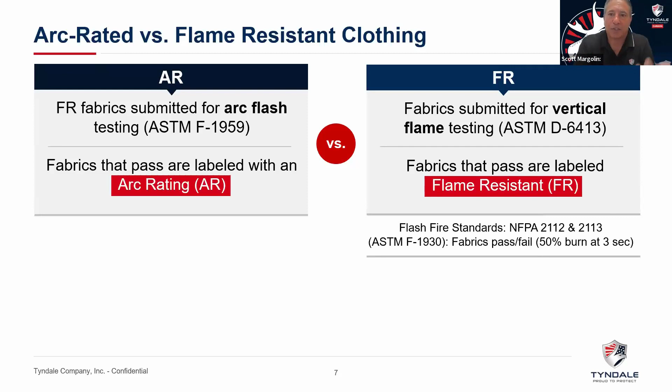Not all FR is AR. So not all flame resistant fabric has been tested in arc, because if you're selling to welders, why do you care? But all arc rated clothing is flame resistant. Hopefully that makes sense.

Okay, so why do you need it? Again, the most catastrophic injuries and fatalities - and that's a mannequin, by the way. I like to keep it real, and each time I turn the page from mannequins in labs to real people, I'll warn you in advance, but that's a mannequin.

And you can clearly see here that the arc comes out of the box, right? It hits him in the front, doesn't hit him in the back. But as soon as that shirt ignites, you're now going to expose much more of your skin surface area to fire than the arc would have if you were naked. And that is, again, because you're wearing fuel, you're covered with fuel.

And the part of your body that typically doesn't have that clothing on is up here, right? And where does heat go? And where does fire go? So it's not a good thing to allow to happen. Where flame-resistant clothing and arc-rated clothing won't ignite, will self-extinguish, and limit the area of injury. And if it's insulative enough, the area of injury under it as well.

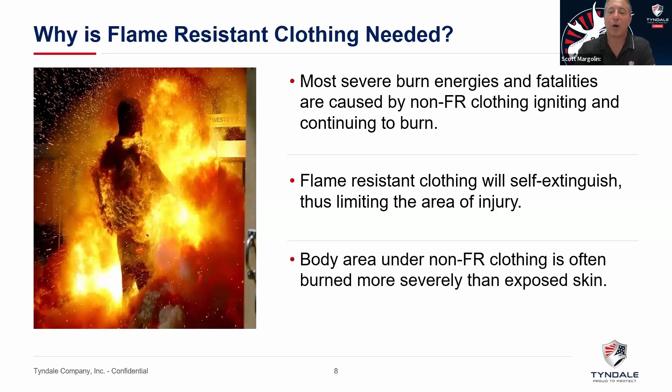So again, not to belabor a point, let's put all that aside for a minute. Let's spend 2 or 3 minutes talking about what we're looking to avoid here. This, if I said, why do you have to wear a seatbelt? Well, you either wear it because you don't want a ticket, or you don't want to go through the windshield or the steering column or the B pillar or whatever. This is kind of like that.

When there's an incident, and you're hopefully never in this position - if I were live, I'd ask how many of you have been - you're sitting in the burn center or the emergency room. You're waiting for the surgeon to come through those double doors. The first question in everyone's mind is always, will he live? Will she make it? What's in the burn surgeon's mind at that moment to answer that question is 2 things.

Generally, the age of the victim - the older you are, the less likely you are to survive the same TBSA, or total body surface area, that receives 2nd or 3rd degree burn - and the TBSA, or total body surface area. So age and total body surface area.

Now, 1st degree burn is sunburn. We've all probably had that. It hurts, but it heals. We don't need medical intervention. We measure it, but we don't report it because it's not predictive of fatality.

So if you know 2nd and 3rd degree burn, and you just heard me say it's 2nd and 3rd degree burn combined that predict fatality - why? That makes no sense, right? They're clearly way different injuries. So let's explore for a minute what makes them the same for predicting fatality, because every fiber that you can buy for arc and flame resistance, every fabric, every garment, every brand, every standard, every ASTM test, every CGSB test is all predicated on the fact I'm about to get to that's not written on this slide.

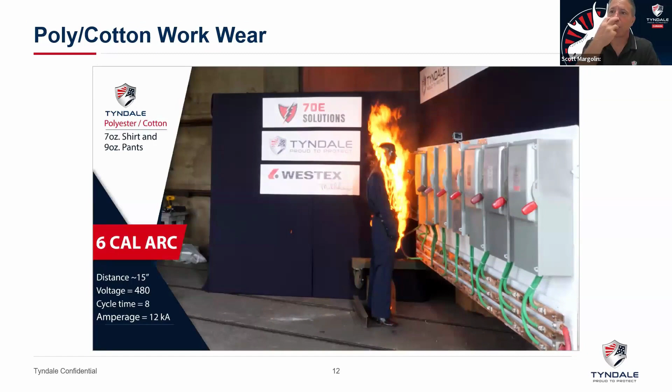You can see how quickly the fire spreads to areas like the lower legs and back that it never even hit. Clearly, little holes are all right here. We use GoPros for a lot of this so you get a really up close and personal look at these things.

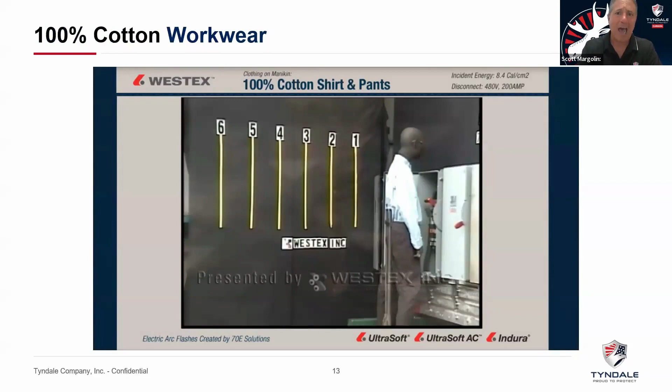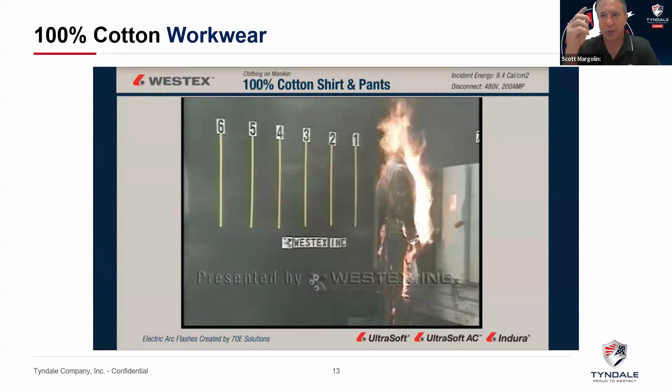The biggest myth in our business is that cotton's protected. Cotton is not protected. It has four major problems: it ignites as easily as you can clearly see, burns hotter meaning you'll do more damage to yourself, fire spreads more, and it's way harder to extinguish with a foam extinguisher since you're not using water around your electrical gear — in a foam extinguisher this will reignite, reignite, reignite. And cotton's heavier, meaning more fuel, longer fire, worse burn. So cotton is not acceptable except as a base layer, completely covered by FRC.

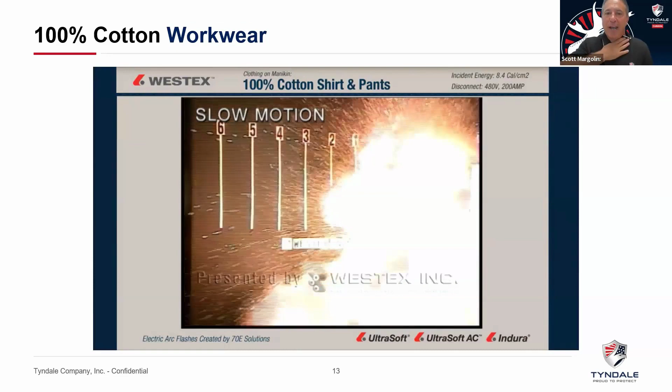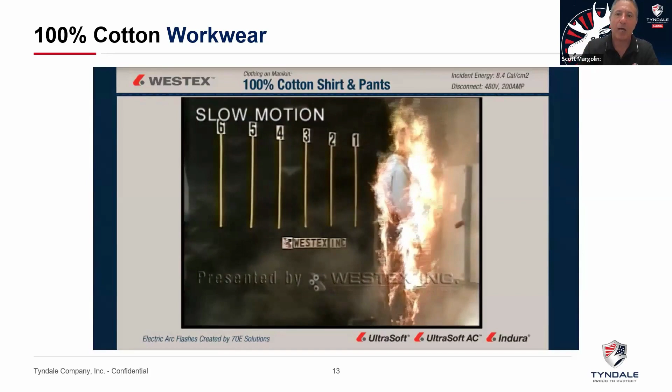What about flame-resistant and arc-rated clothing in those same circumstances? Wrong video — so this is actually exceeding the arc rating of the garment a little bit. I want to show you that on purpose.

So all these videos are downloadable. They're all narrated, so you don't need to hear my talk right now to be able to use these in the future. But as I mentioned at the outset, I like to keep things real. So that was the lab.

What about the real world? Now, I've learned better than to use pictures from a country that I'm speaking in, so these are from South America. All it takes, folks, is to once in a live presentation run into people in the audience who know the victim on the screen, and you'll never make that mistake twice.

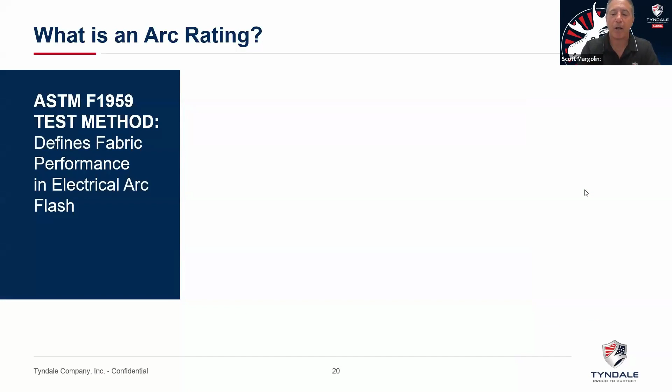So let's talk about ARC flash and ARC ratings. The ASTM F1959 test method, the ARC rating method, which I happen to chair, the vast majority of that work is done at Kinectrics in Toronto, and it defines ARC flash. There's two ways to get a rating: ATPV and EBT.

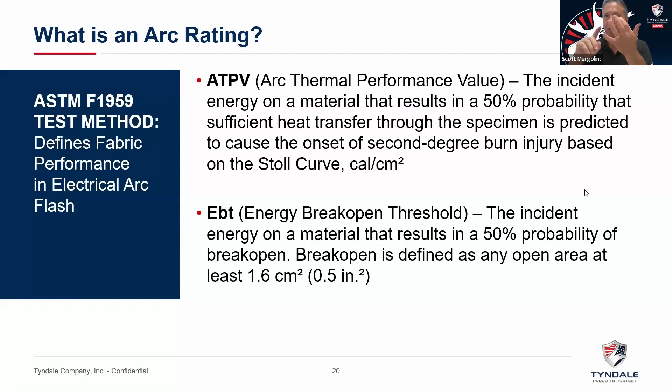These confuse a lot of people. The truth is, it doesn't matter whether it's ATPV or EBT. They're just two different ways to fail the same test. The test is the same. The fabrics are the same. The difference is how it fails that test. What do I mean by that?

Well, an ATPV fabric will let a burn through the fabric, but not a hole. An EBT fabric will allow a hole through the fabric, but not a burn. Well, you don't want either a burn or a hole. So we keep testing until we get either a burn through the fabric or a hole through the fabric, and that's kind of where you stop. I'm oversimplifying it a little.

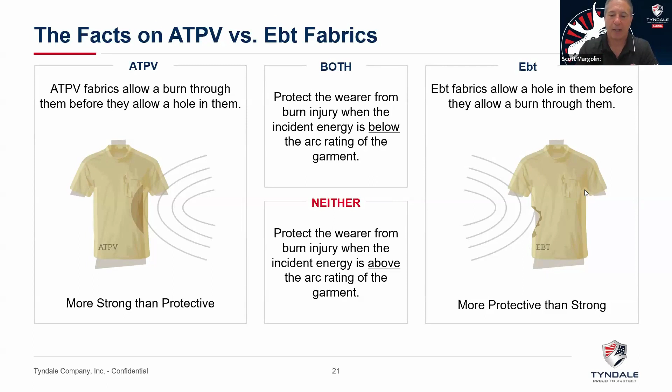But then you have an ARC rating, either an ATPV, meaning you got burned before you got a hole, or an EBT, meaning you got a hole before you got a burn. Either way, you don't want a burn or a hole. Both ATPV and EBT protect the wearer from burn injury below the ARC rating of the garment, so they're the same in that sense. Neither protects the wearer above the incident energy rating on that garment. So they're different in how they fail the test, the same in every other respect. Put that to bed - they both protect equally.

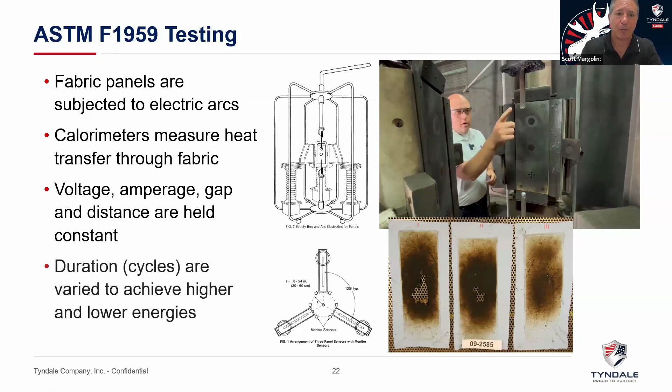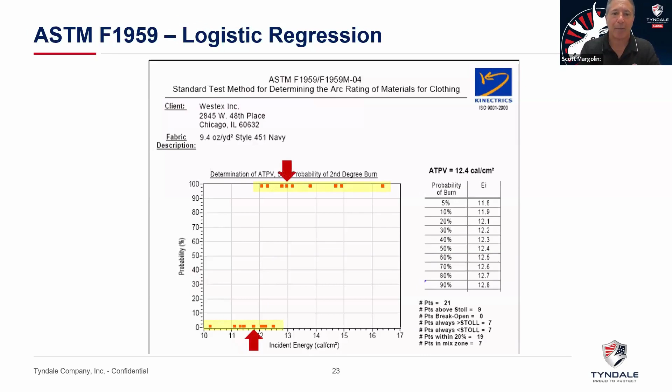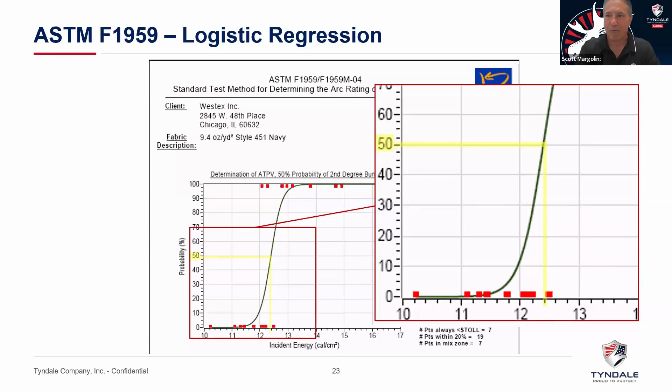The computer then averages that data, the top that failed and the bottom that passed, and it creates a black line through it at the 50% probability, where the 50% probability of a burn crosses our average. You come down to the bottom of the graph, and that's your ARC rating - 12.4 calories for that fabric and everything ever made from it. It's a really good test. And again, the vast majority of this work is done in Toronto at Kinectrics.

So now that's how you comply. What about compliance versus protection? Are they the same thing? It may be, maybe you think they are. A lot of people do. Safety people are busy - you got fall protection and hearing protection, backs, worried about people backing their vehicles into things, illness, whatever it happens to be. So it's really tempting to take a shortcut and say, anything that's Cat 2, I'm fine. 8 calories and above, I'm Cat fine. 2112 compliant, I'm fine. 15520, I'm fine.

What nobody ever tells you, and you won't know unless you look, is how many times is that fabric sample washed before it gets in these tests.

It tells you how good the fabric is new, and it tells you nothing about how durable that flame resistance is to laundering. Nothing. 1506, which you have to have or used to have to be 70E and Z462 compliant, requires 25 launderings. If you wear your garments during the week and launder them on weekends, 25 launderings gets you 6 months. You're now out of arc flash FR durability standards on planet Earth at 6 months, 25 launderings.

What do you do? Trust matters, reputation matters, experience matters in this business. Now, 2112 and 15520 have a 100 laundering standard, which is better than 25.

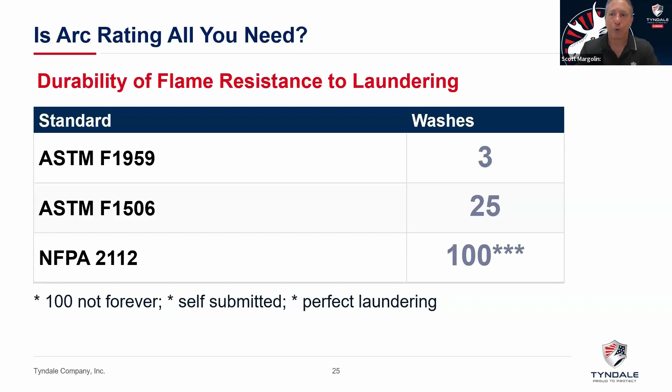So there is no guarantee of flame resistant durability by any of these standards, no matter which country, no matter which hazard you look to. Experience and track record matter, and they matter a lot.

Again, the compliance, what a lot of people will do is shorthand: I want inherent, I want Cat 2, I want 2112, I want UL certified, I want the lightest stuff you've got. What they probably should be specifying is trusted brands and suppliers, guaranteed flame resistant for the life of the garment, without an asterisk that says per 2112, 100 launderings.

By the way, weight doesn't equal comfort, and you might want to start specifying Oeko-Tex 100. That is not Canadian or American, but neither of our countries has a good standard for toxicity of chemistry and fabric, which is becoming a bigger and bigger issue.

Now, all the reputable stuff produced in North America, there's really no issue there, but more and more we see products where there are issues, inexpensively made, cheap products from overseas. Oeko-Tex 100, if it passes, will make sure any fabric chemistry that's there, including dyes and finishes, not just FR chemistry, is below thresholds of concern.

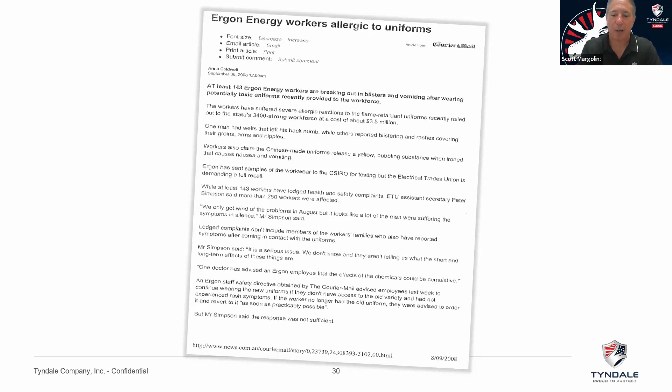You stay with the reputable brands, the proven, experienced brands. This is not a business where the lowest cost product is probably worth exploring. This is the biggest cause of failure.

It's crazy. So shrinkage with these garments, a lot of these fabrics — the last thing that you do if you're a fabric manufacturer, if you pre-shrink, is pre-shrink. The equipment's expensive, the equipment's slow, it's often the bottleneck in your production. If you have a 1,000-yard roll right before you're going to sell it to Tyndale or Carhartt or Ariat or Bulwark, you put it through the shrinkage machine and it compacts it. Out the other end, you get about 900 yards. What'd you just do to 10% of your inventory? Gone forever, right? Gone forever.

But if the garment fabric manufacturers don't pay for the shrinkage, you will. So you don't want to be throwing garments away a quarter of the way through their useful life because they don't fit anymore. So we look back to the standards, whether it's Z462, 8 cals, 2112.

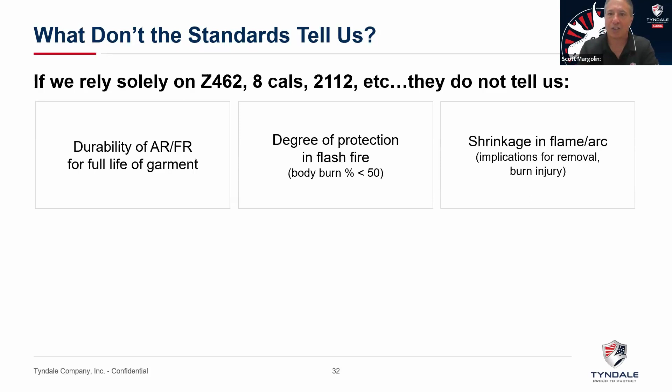They don't tell us about the FR durability of the garment. They don't tell us about the flash fire protection — you'll just say it's less than 50% if it's 2112. You don't know how much less unless you ask. They don't tell you about shrinkage in flame, which matters a lot. Can you get the garment off using the zipper or the buttons, or can't you? They don't tell you about shrinkage in laundry. They don't tell you about potential toxicity unless you specify Oeko-Tex 100. And they sure as heck don't tell you about the thing you probably care about the most, or your wearers do, and that's comfort. Because if it's not comfortable, they're not going to wear it. You're not going to be compliant.

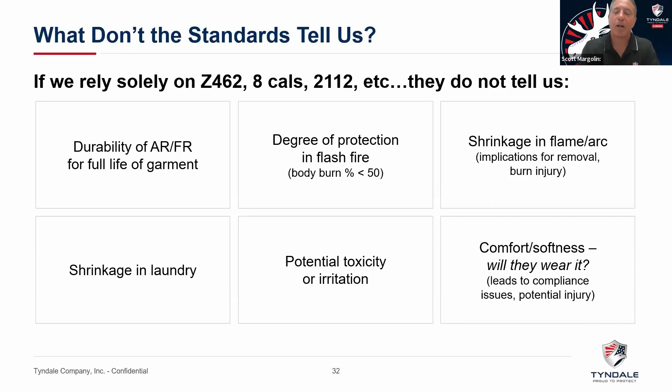So let's turn the page there. Boring, we'll skip that. Comfort, heat stress, and FRC. Heat stress and comfort are not the same thing. They're completely different, and that surprises a lot of people.

Comfort is inherently subjective. If we were live and I looked around a room with 130 people in it, I guarantee you, even though it's the same temperature and humidity in the conference room, there's people wearing long sleeves sitting next to people wearing short sleeves. There's people wearing one layer sitting next to people wearing two layers, sitting next to people wearing three layers. There's people wearing wovens that button up, people wearing pullovers, people wearing quarter zips. What is comfort? Comfort is inherently subjective, person to person, moment to moment, and it doesn't mean what you think it means.

Where heat stress is a definable, quantifiable medical condition caused by body heat building up inside your body that you can't dump either by radiation or by sweat. And then you have organ failure and potentially death if you don't arrest the process.

So PPE — hugely important line in this presentation. No single layer breathable apparel, arc-rated or flame resistant, causes heat stress. I'll say that again: no single layer breathable AR/FR clothing causes heat stress. What causes heat stress is non-breathable, like Tyvek or rainwear, or multiple layers like 40 cal arc flash suits, but not single layer breathable. Heat stress is caused, number 1, by poor hydration, because now you can't sweat. Number 2, by lack of shade, because now you're not getting out of that radiant heat load from the sun. Number 3, by lack of rest breaks to dump metabolic energy you're building up in your body, and sometimes by illnesses or medications. It is not caused by single layer breathable PPE.

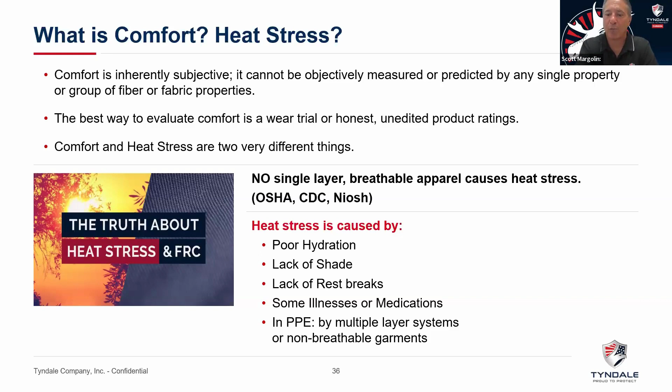So on the comfort front, the stuff coming in your screen now is what almost everybody thinks, when you talk to them at a trade show, causes heat stress.

Pardon me one second, because I don't want my laptop to die. I'm going to go plug it in and continue to talk. That was a mistake on my part, for which I apologize. I thought it was plugged in, and it's not, but it will be. We won't lose you.

So what is comfort? It's not the weight of the fabric, it's not the hand. Breathability is what everybody thinks - weight and breathability, give me your lightest weight, most breathable product. Well, the lightest weight, most breathable fabric that Jason and I are aware of is window screen.

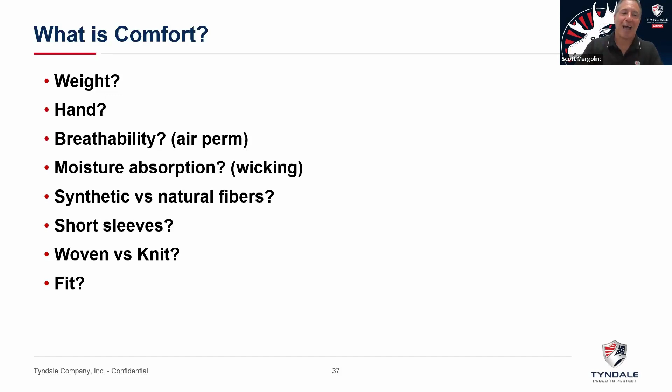You're not wearing window screen. So it isn't about numbers. A combination of these factors, maybe, but at the end of the day, what really controls comfort is choice. Number one, if you've ever gone to the beer store, or taken a kid or grandkid to the cereal aisle of a market, you know Canadians love choice, agency, the ability to decide for yourself.

Some people want a quarter zip. Some people want to wear the color they like, blue, red, whatever. Some people want a brand - Nike, Under Armour, Bulwark, Tyndale, Ariat, Carhartt. That's what makes them comfortable that day - the brand they're flying, the color they're wearing, or the style.

When you go to the store in your personal life to buy a garment, do you walk in and look for the rack of the lightest weight clothing? No - you go to the rack of the brand you like, or I'm looking for a quarter zip today, or my Levi's, or my Carhartts. That's what you look for, only then do you touch the stuff.

So choice is number one. Number two is fit - if it doesn't fit, it doesn't matter what it's made of. And only then do the things that most people think matter start to matter.

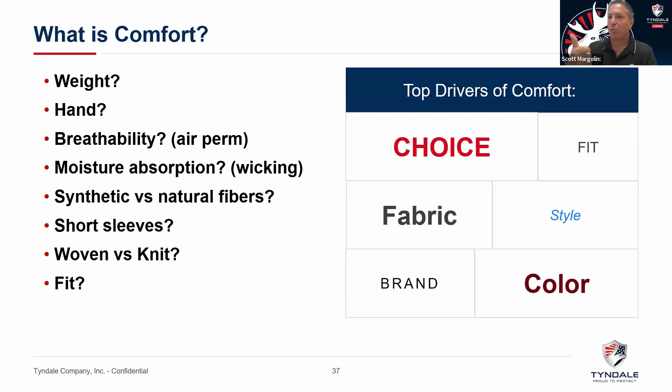So anyhow, that's the difference between heat stress and comfort. The number one thing you can do to improve an FR or ARC-rated clothing program tomorrow - to have complaints go down, compliance go up, garments last longer - is to give your people choice. Choose from among garments that meet your protective needs and your company's branding and image needs, then give them a choice of multiple options within that, so they have agency, they order it, they own it, it gets shipped to them. They're more likely to wear it, more likely to wear it properly, more likely to take care of it, and it's going to last longer.

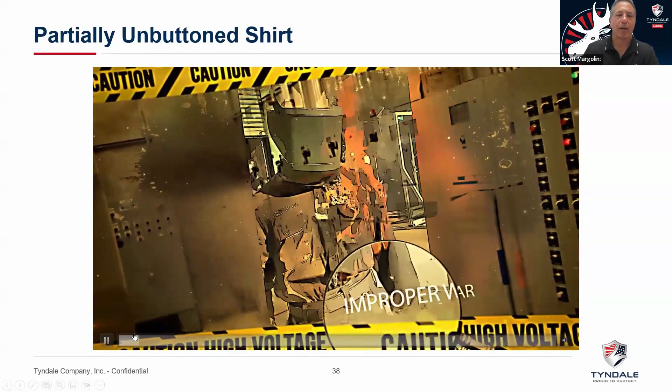It's human psychology. Improper wear - what happens if they're partially unbuttoned, exposed?

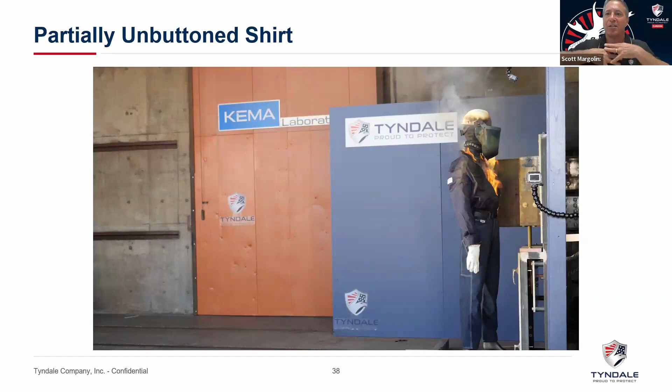So not much cotton was exposed, right? But guess what - now you're breathing fire, you're burning your face up under the face shield, and the fire is spreading underneath the FR clothing, and the FR clothing is now keeping the heat in, not out.

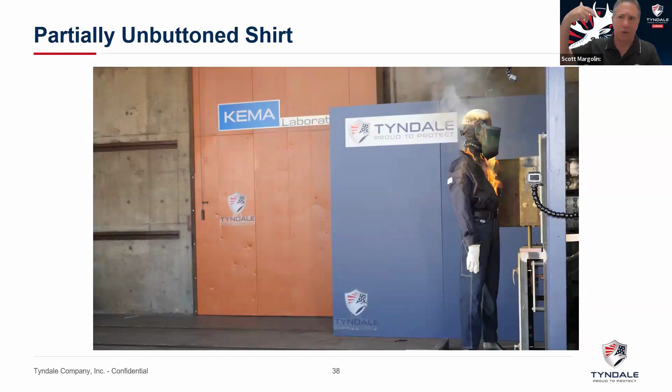So we have a whole series of improper wear videos designed - they're all brief, non-commercial, educational, narrated, so you can show people the dangers of doing these things.

If you see all the smoke pouring out the buttonholes of that shirt, that's because the ARC got up underneath the unbuttoned shirt, carbonized the cotton t-shirt that the mannequin's wearing that he should have been safe in, and he's now being burned underneath it because the shirt was unbuttoned, allowing the ARC to get in there.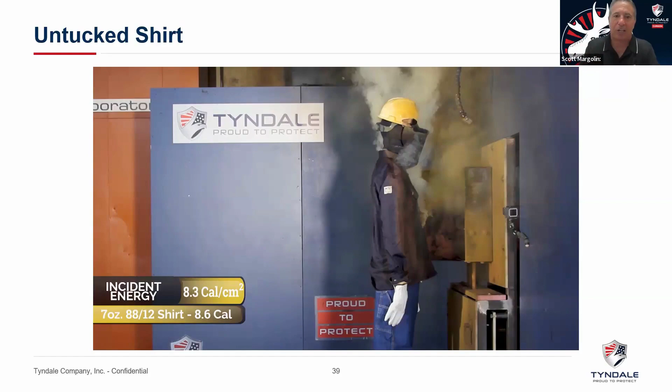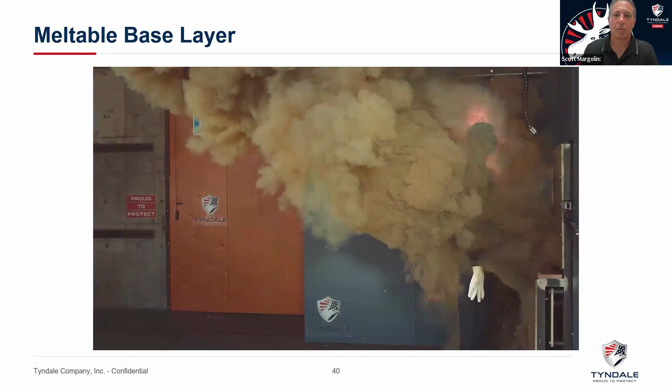Here's another video - this one's meltable base layer. So what you noticed was there was fire.

So there are probably 15 of these videos that highlight different improper wear. Feel free to download them and use them anytime you want in your safety talks. All right, we're coming toward the end here. We'll wrap up and then turn it over to Jason for an electrician's view on all this.

Where is ARC-rated and flame-resistant clothing going? Now, I don't have a crystal ball, but I've been doing this a long time, and I can tell you what I think, so I will. There's been a huge expansion the last few years of fabric brands, fiber blends, garment brands, laboratories that do the testing even. That's all arguably good, but it makes it harder to keep track of everything, even if you do it full-time like I do.

So what I would urge you guys is - more important than ever, so it's better for choice, right? Better for compliance. You've got more options, more comfortable, more stylish, lighter weight. But more important than ever as a result, to have a knowledgeable, trusted FR/AR resource - whether that's somebody in your company who you pay to get current and stay current, or somebody on our side of the fence who you trust. Make somebody like that a part of your life. Write a tight specification, and monitor that specification, so that two years later, when you're worried about fall protection, some vendor that you've just hired because they're low cost isn't sticking something in your program that's not good for you.

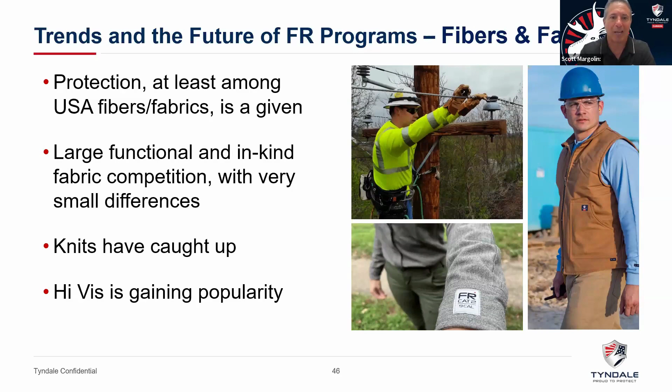So the future, high vis is getting bigger and bigger, and as are sort of the styles that we wear when we're off the clock, right? So knits have gotten way better than they used to be. High vis has gotten better than it used to be. Those are options that a lot of people like now that they are practical and affordable, and in some cases stylish. So you have more garment manufacturers, more styles and types. Base layers are a big deal. Now that knits have gotten lighter and better, you can wear ARC-rated and flame-resistant base layers that are actually lighter than a regular cotton t-shirt, don't burn, add to your ARC rating, add to your 2112 protection, and are quicker drying than a cotton t-shirt. They exist now, and they're not a fortune, and they don't have massive shrinkage anymore.

The branded lifestyle apparel, you're probably familiar with Ariat and Carhartt and Wrangler and all that. It's amazing how much stuff has come out in the last few years - that you can't tell to look at it, to wear it, to wash it, that it's FR or AR. It looks just like regular apparel. And boomers retiring, millennials coming in is changing the styles as well.

Another big thing that's happening is people who started in task-based: I'll put on an FR coverall when I need it, otherwise I'm wearing this. That is slowly being replaced by daily wear where it makes sense, because of continued injuries in task-based where people just weren't wearing the gear because they weren't required to.

In terms of styling, that's flame resistant. That's flame resistant. That's flame resistant. Chances are at this point, if there's a style you like in your personal life, it exists in FR. It just really is.